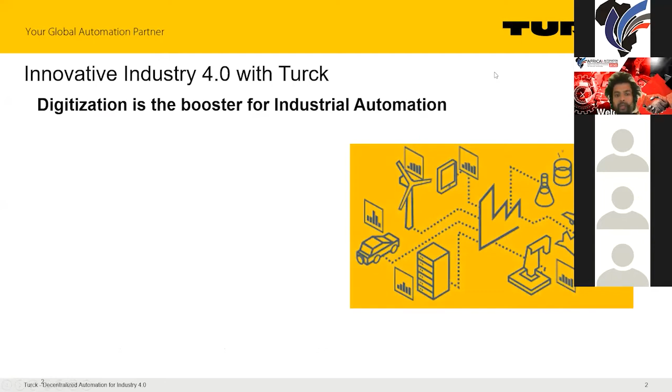We know that Industry 4.0 is something we have to boost, and digitization is the booster for that industrial automation. We know that we have to connect a lot of things in the end. Communication is one of the most important parts in that whole world, and it is about open systems. We have to talk about open architectures, no closed single systems for each vendor or each customer. We have to have very connected and digital products in the end.

Kenneth just told you something about inductive sensors and IP67 IOs, but all of those things have to be connected in the end. Connected product is maybe one of the key successes, and the other one, of course, in terms of connecting will be software.

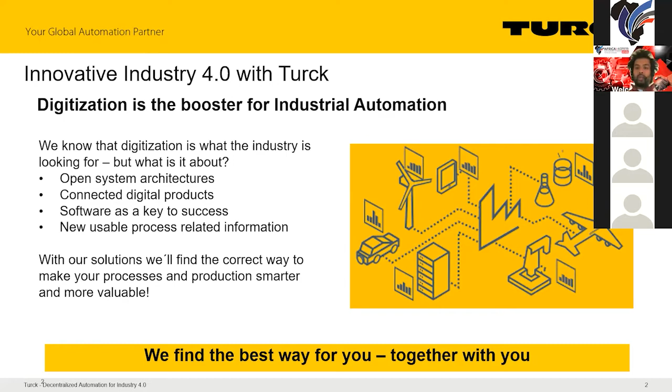Software is something we have to face in the near and far future more and more in the industry. We have to use new information out of assets in the field. We are already working with sensors and actuators, but now we will get more and more information to use. Our solutions at Turck will find the right way to make your processes smarter, more intelligent, and more valuable in the end, and that's the most important thing for you guys. It has to be valuable - you have to be able to sell it, you have to be able to save costs in the long term. This is something we are facing on with you, for you, as soon as you want.

The technologies we are facing with this whole story are, of course, based on connection and software - intelligent and decentralized connection. You already heard about the term IO-Link, but there are a lot more technologies in the industry which are not only trending but really used in the industry already in different countries. We are able to do tailor-made solutions - we're not only doing that standardized thing, we can do it as you wish in the end. And we can manage it and do new things with software and services as well, not only with a new product.

And of course, maybe getting more and more important is that topic named security. Security is something we also face a lot with our customers, and our solutions here are based on very limited data. Don't get everything into an asset, don't get everything up to a cloud system - just put the data inside which you really need in the end.

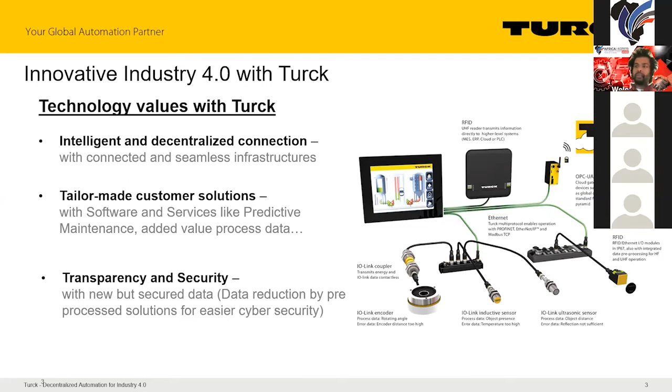Why do I tell you these things? These are the basic things Turck is delivering today. So 20 years ago, 30 years ago, we delivered a lot of products in the end. Today, we are changing more and more into that company which will help you improve your production, improve your processes. Our vision of being a leading digital automation company is based on 3 topics we are facing here: Industry 4.0, this is the topic we are now facing everywhere in the world, which is coming from Germany, which was founded more or less in 2011.

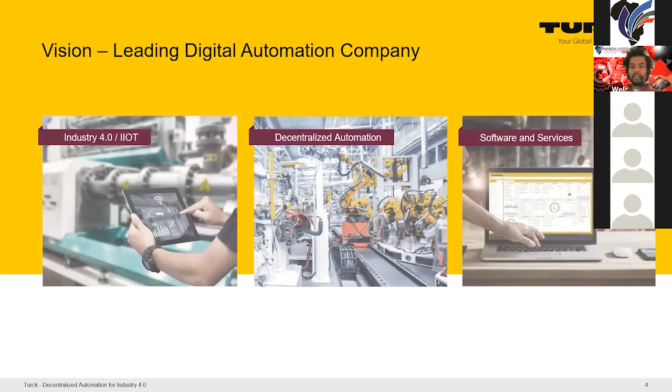Decentralized automation means getting more intelligence, more logic control into fields, into the applications, and also software and services. How we want to push these three vision topics is based on the products and technologies you see here. IO-Link is one of them, Ethernet, OPC UA, the field bus world where we all grew up, Ethernet-based or non-Ethernet-based field bus systems. We build up that pyramid, and you'll see it a little later, because this is something we more and more see will be broken up. We know that with services and software, we will break them up. Above all of them, assets, we are talking about cloud solutions and connected systems, not only connected products. That whole environment shows a little bit of our offer to you as customers.

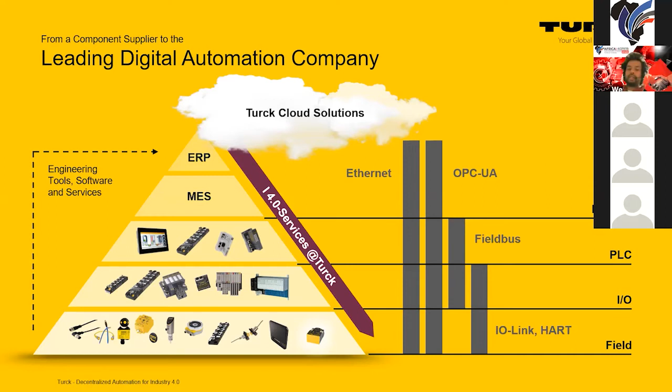And now there's a hard break. Do you know anything about sailing?

I will show you the landing page where we are describing decentralized automation. From a marketing standpoint, we decided to do something totally different. Don't show too many products, don't show too many technical assets. We want to face people with a story around it, something people could tell through narrative or storytelling. And we took sailing as a topic for describing decentralized automation. Why did we do that?

Decentralized automation doesn't mean that we take the controlled system from a centralized asset and just put everything into decentralized assets. It means we start to improve a machine or a process for a customer by decentralizing single processes. So we have 100% of a process, and we get 10, 20, 30, 40, 50, maybe 95% of that process and put those processes into decentralized assets. So now that big centralized controlling system is shrinking, and we add decentralized assets to enrich the whole system by distributing the intelligence into the field.

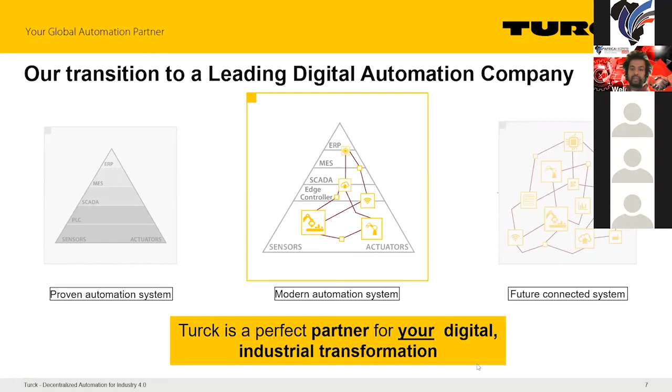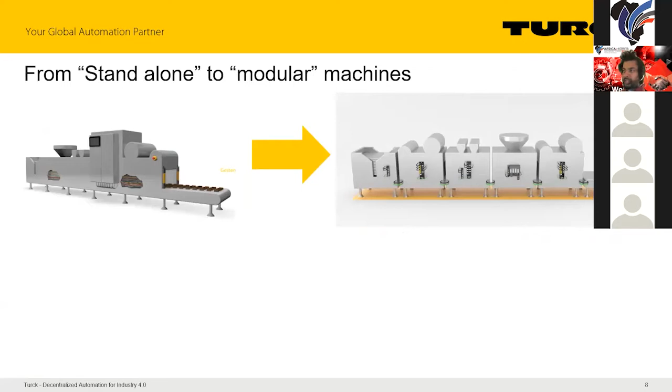One part of that vision of decentralized and added value automation systems is having a standalone system which is becoming more and more modular. In the past, or maybe also today, we design machines in one line, and we have projects where we dream of a world where you can cut that machine into little pieces, and every piece is equipped with its own logic.

Imagine this machine, and the opposite of it is this one. You can just take single modules. Every module itself is more or less intelligent on its own, but it's connected to the modules next to it. They are all connected by another one - it can be a cloud system, an MES system, whatever you want. And you can swap those modules.

Imagine you have a line of 6, 7, 8 modules, and you have customer A, and then customer B comes and tells you, I don't want this module, I want another one. You can just swap that. And believe me, we have something in, for example, the intralogistics industry where we did exactly this.

They have a mid-size logistics plant with different assets, and there was a real partnership project. They asked us to help them, to support them in a new design in a modular way. And now they have a very modular way of building up the logistics system, the logistics infrastructure, and they can change the modules whenever they want.

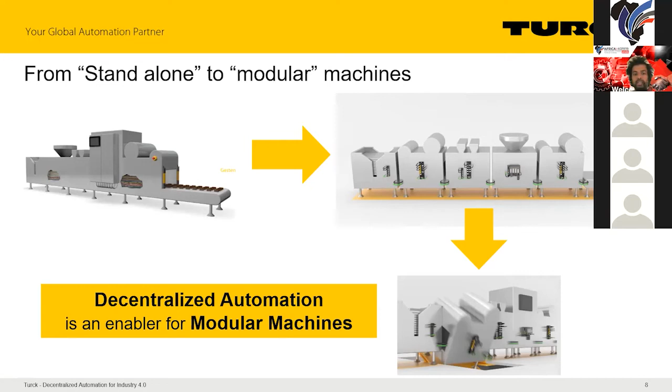Of course, there are some restrictions, for sure, if you just think about the mechanical restrictions. But from the machine point of view, you can just take it and put it in another place, and then start to work. This is something where we also see decentralized automation as an enabler for those modular machines, which is what we see outside.

What are your benefits? The main benefits we see for customers are short time to market, fast machine setup, lower costs of course, and increased availability. What does this mean?

Short time to market means especially the case I described a second ago. You have a machine line and you can design that machine line for your customers more or less on demand. So you can have a concept, and as soon as the customer asks, hey, can you change this or that, you can just swap and try to figure out if this is the right solution for the customer. Plus, you can also do a pre-test.

Maybe you've heard of the term factory acceptance test, which is quite common in the pharmaceutical industry or in the chemical industry. As I know, I'm more inside pharmaceutical, but they like to have a pre-tested machine module before using it in their plant. And if you're talking about a pharmaceutical plant, it's huge. That's what we know. If you can now offer a machine module which is already pre-tested on its own, and you only have to test the whole process instead of testing the single machine plus the whole process, you save a lot of time.

This is something we saw with some customers in pharmaceutical, where we sold them a system, or offered them a system. In the end, we also sold that, where they can do a factory acceptance test before using it in their plant. And of course, it's part of being agile to do all that - you do a test, get some results, get feedback from your customer, and then you change your own process again.

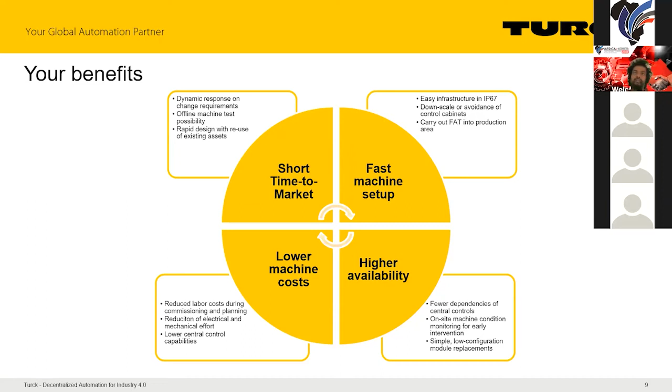Of course, low configuration effort and so on. This is something our guys in South Africa can really tell you, how easy it is to configure all that stuff. Decentralized automation helps you be a little bit faster and more efficient by using that. So we split it up, decentralized automation, into 3 topics: modular machines, condition monitoring, and industrial track and trace.

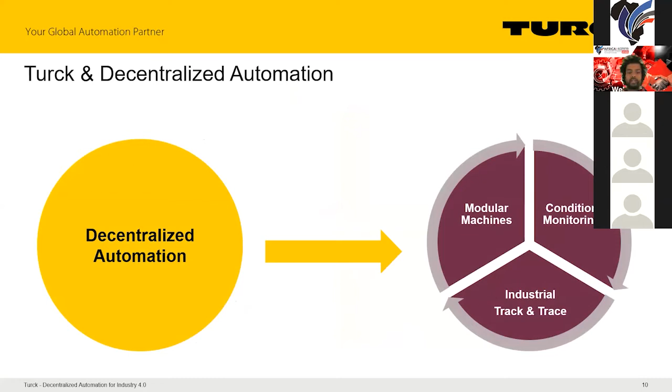I told you about the modular machines very deeply, I suppose. We believe more and more customers and industry partners will go into modular designs. It's not only factory automation, it's also process automation and logistic automation as well. And we see a very big trend of this happening very quickly.

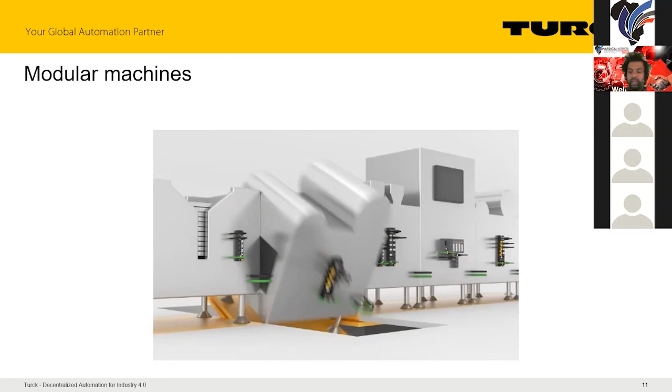Condition monitoring is something we have had on our roadmap for years. We came out of sensors, and of course we have to deliver data, and this is the main part of the story. We have to deliver the data, but also we have to make that data valuable for customers and users in the end.

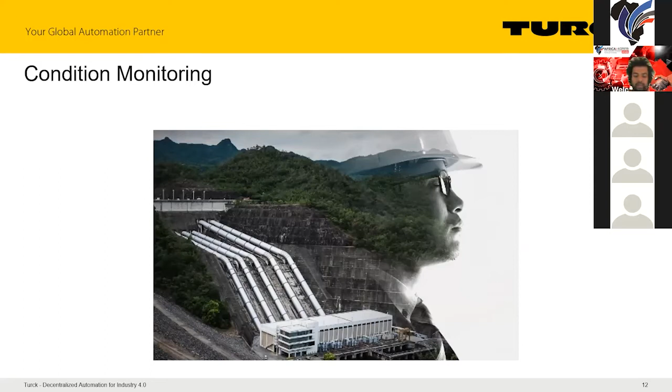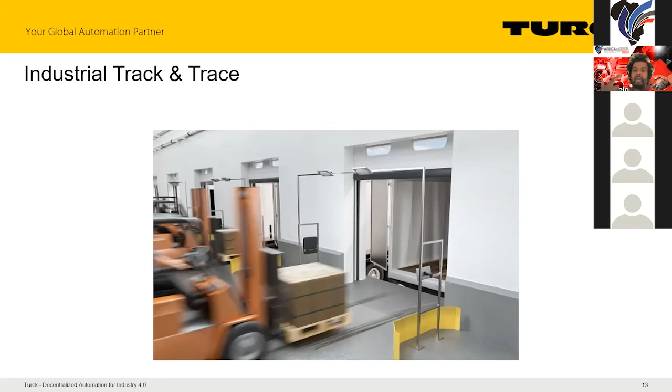Industrial track and trace is something we see as the connecting asset between processes, like a machine process, and the identification part. So from production to the warehouse, or the other way around, from inbound to production, we need systems and solutions to make it easier for customers to exactly know where do I produce, what do I produce, how well do I produce, and how long will I produce. What is it based on in terms of products? So very important for us is using, we're talking about edge controllers, so we're talking about PLC systems.

We are not able to build up a new software environment from scratch, there's no way to do something like that. So we chose to use an open source platform, and Codesys, if you look into studies, is I suppose the number 2 used engineering software for PLCs. If you look at vendors of PLCs, a lot of companies are using Codesys because it's open source, free of cost, and based on license models to use it onto your own devices. We did that as well, and we are using Codesys as the platform for control software, controlling assets.

We have IP67 blocks that look like a standard I/O block, but it's equipped with a PLC inside. It's quite funny to use that, but also HMI-based PLCs, which I'll come to later. And also we have IP20 stuff, it's just based on our history, but we also have a lot of people who still like IP20 systems, so of course we have to offer something.

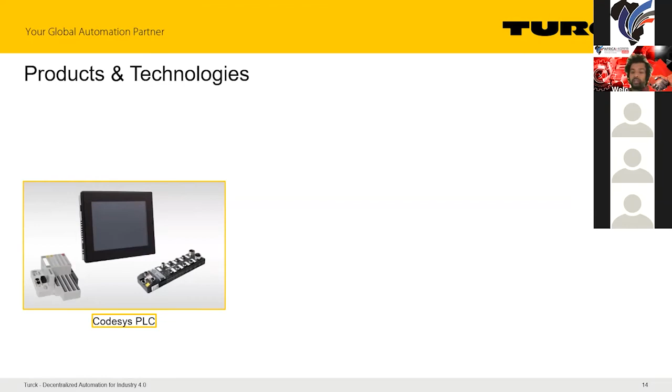This is the limited version of a PLC, called FLC, Field Logic Controller. FLC is something we more or less invented ourselves with a programming environment called ARGEE. ARGEE stands for a really great engineering environment - it's American, that's the reason for the name, but it's really cool to use. As Kenneth already introduced me as a marketing guy, even I can program that module. You can choose between ladder logic, just click and change, or you can really program something. And it's good for doing some local tasks.

For example, that factory acceptance test. Just to give you an example, the factory acceptance test at that pharmaceutical was to control and see if the products they build up on that skid are working properly. So they had some valves, some lamps, some sensors on it, and they wanted to see if the stuff is working properly before bringing out that machine to a customer. Our customer, our skid builder customer, is using ARGEE FLC to do that factory acceptance test.

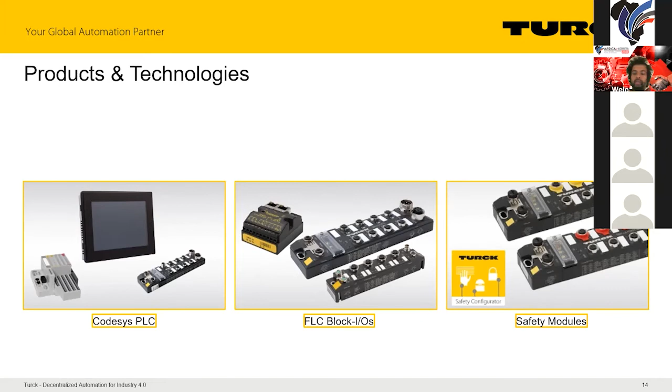More products in the end - I told you about those RFID systems. Even here we have two different ways of using RFID data. The first way, let me call it the standard way, is doing track and trace processes and so on with the PLC. Of course we deliver that, but we also see a lot of applications where you don't use the PLC for that data. Just as an example, you take the production data of a good you are producing, and you want to have that data in your ERP system. You don't have to use standard field bus protocols or something like multi-protocol Ethernet. You can just directly go via OPC UA. You can pre-process the data in the module, bringing that data via OPC UA into the ERP system and use it there. The PLC doesn't have to know everything.

IO Link - as Kenneth already mentioned, it's one of my babies at Turck, and we have a great portfolio to support this technology. We're one of the founding members of that technology group. Even here, we're talking about decentralized intelligence in terms of sensors, lamps and actuators. Imagine you have a lot of different automation components which are now connected via one single interface - this is something IO Link is more and more getting into.

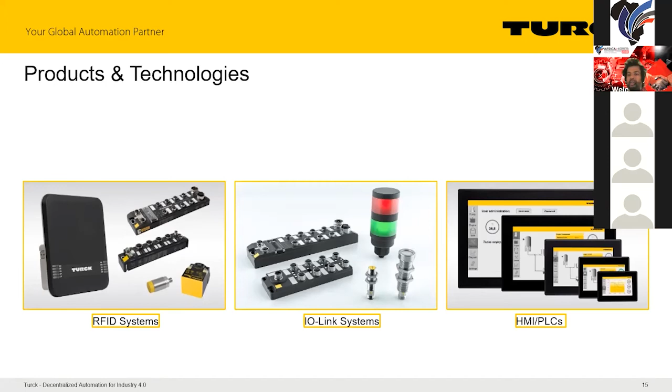The guy at the machine just has to know: is it okay or not okay? The guy with the smartphone dashboard has to know exactly what is happening. It's quite flexible and usable, very efficient.

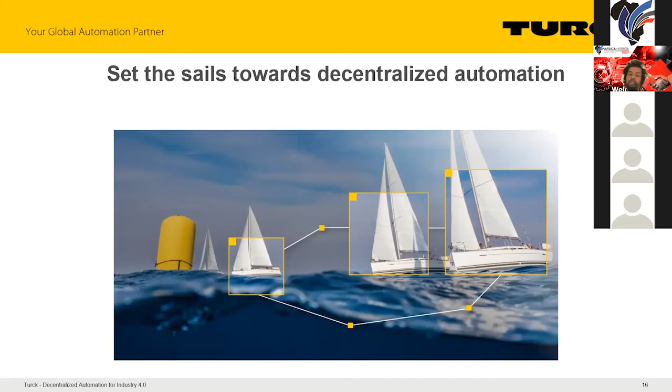So I showed you that boat picture earlier, and I'll show you the landing page in a second. What we wrote downstairs is 'set the sails towards decentralized automation.' We see more and more people using that concept of decentralized automation alongside the centralized infrastructure they already have, and by doing this, they start to investigate how they can reduce one side and increase the other.

And if you want to see more about that concept—hopefully this works—do you see it already, or do I have to change something? We see it, Si, no problem. You see my screen with the homepage, right? We see the homepage on the presentation. You might need to close that to get the web view. That's what I mean, I have to do a new share of the page itself. Now you should see this, the homepage. Yes, there we go.

I promised to describe why we chose sailing. I learned on a sailing boat—not a very modern one worth millions, but a rough, usable sailing boat. There is a captain, of course it has to be of significant size, it can't be a one-man boat, but you have to have a captain. Like in this picture, someone on that team is the captain, and the rest do tasks for themselves.

Every one of those guys is intelligent for itself, so the captain doesn't have to tell each one to do their task—they can do it themselves. The only thing they're doing is preparing all that information and sending it. In the end, they send the information the captain really needs to that skipper or captain, whatever you call them. This is comparable to that decentralized automation stuff.